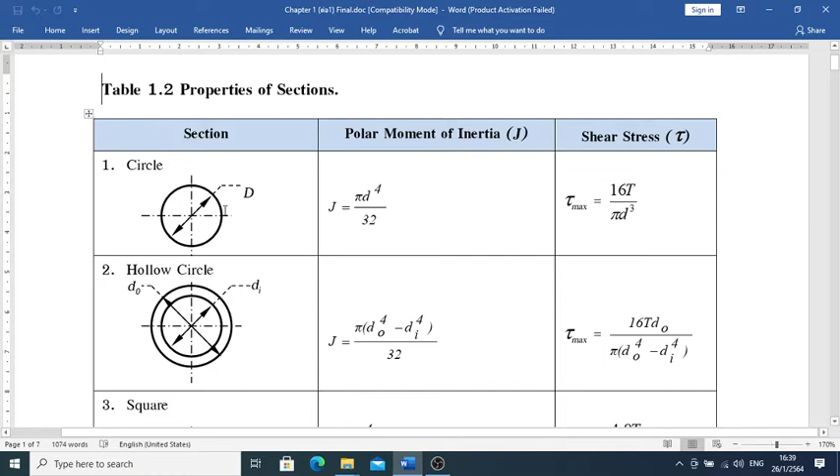And then the shear stress is going to be the tau maximum, experienced right there at the surface, of course. So shear stress is maximum at the surface most of the time. So number one is going to be the circle, and number two is going to be the hollow circle. Each has a corresponding J in the second column, and third is the tau max at the surface.

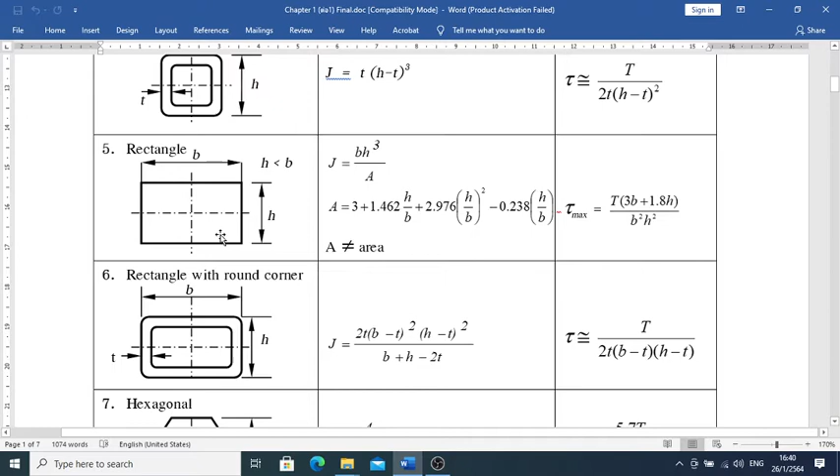Then the square shaft and the hollow square. Then rectangle, and rectangle with a hollow inside, and number seven is going to be hexagonal. That's what we've got, with the J and the tau max experienced at the surface of the shaft, respectively. And then we have an example that I would like to show you.

It says here, a shaft transmits 10 kilowatts of power at a constant speed of 1,750 RPM. It is made of 1030 CD steel. Determine the shaft diameter by using the yield strength and a safety factor n sub y equal to 2 when the shaft is (A) solid and (B) hollow with D sub o over D sub i equal to 2.

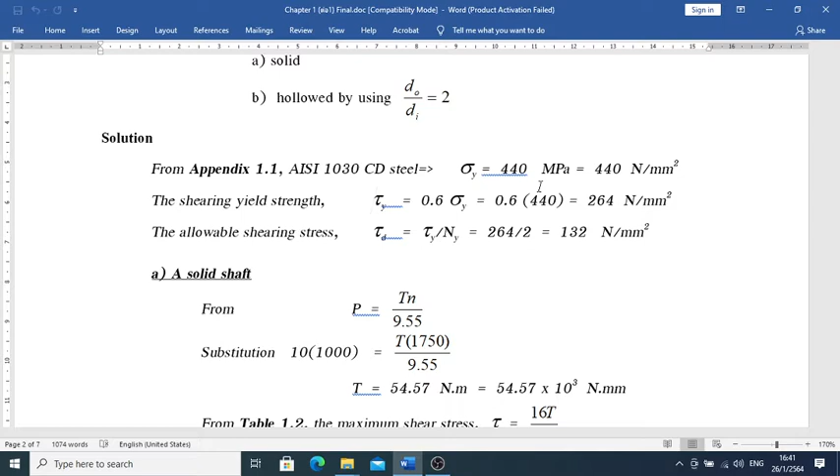So it's given by the problem: 1030 CD steel. Based on appendix 1.1, we get a sigma y of 440 newtons per millimeter squared. Since this problem uses tau sub y, we find tau sub y is equal to 0.6 sigma y due to the simple stress relationship, of course. And then with n sub y equal to 2, the tau design is equal to 132.

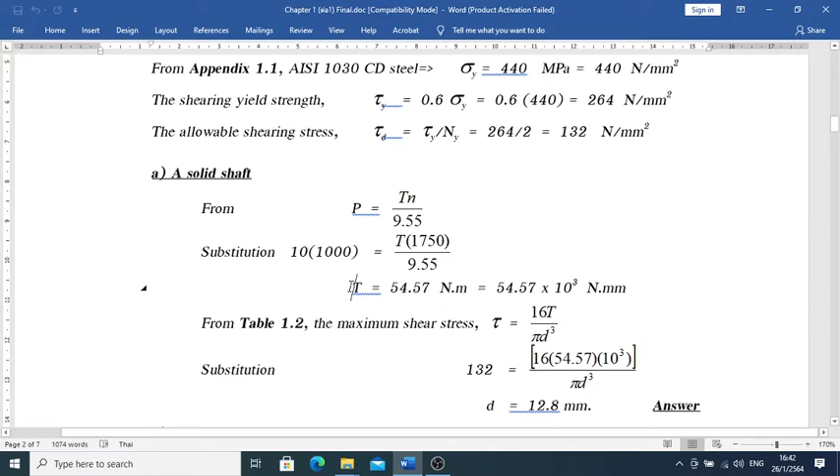Now for the solid shaft, part A. Given by the problem, 10 kilowatts and n is 1,750; 10 kilowatts is times 1,000. We find the torque in newton meters. Then based on table 1.2, tau is equal to 16T over pi d cubed. We make the substitution, we've got one unknown left, and we get a diameter of 12.8 millimeters.

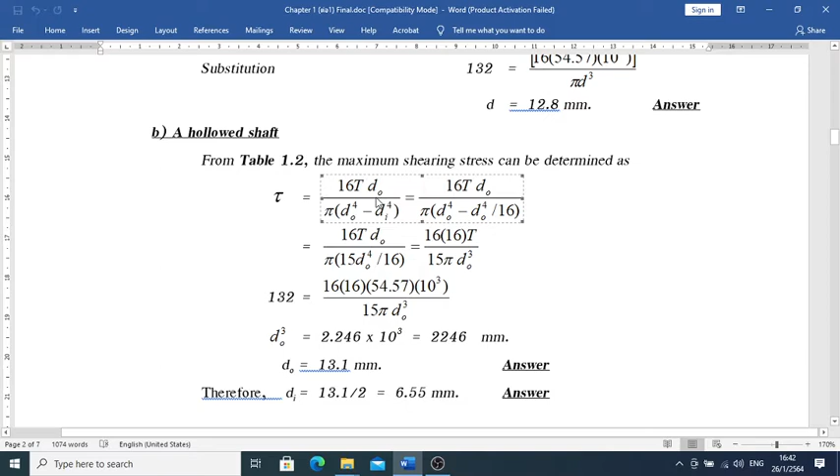That's the answer. Then for question B, the hollow shaft, we just plug in tau in the equation and solve for only one parameter, d sub o. The problem says d sub o over d sub i is equal to 2, so we switch everything to d sub o and plug it in. We get d sub o of 13.1, and then the one thing left over is d sub i.

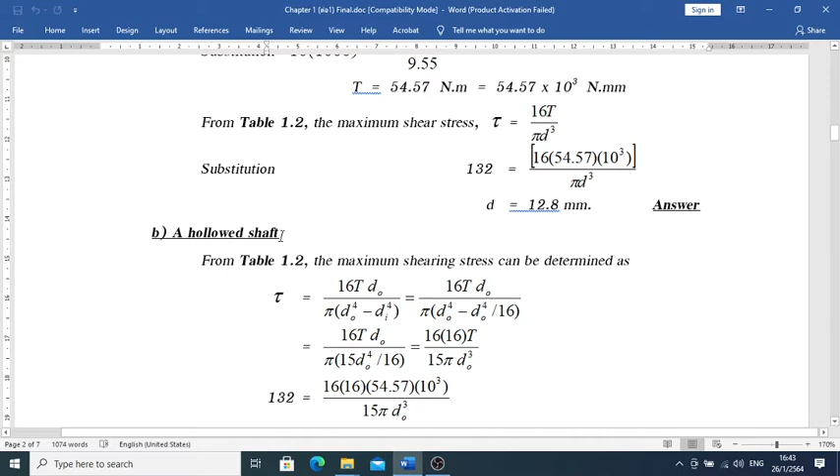So this answer is quite significant. You may compare the answers: d sub o is 12.8 and 13.1. They're very close to each other. Nowadays, with new technology, we can find hollow shafts easily, but during my time it was difficult. Today technology is ready to produce hollow shafts easily. They reduce a lot of weight for the shaft.

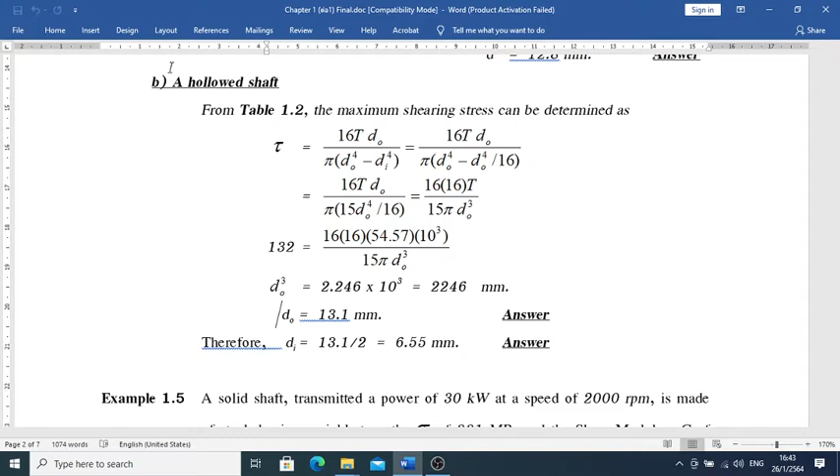Okay. And then example 1.5 is another one you guys should think about. Have a look at it by yourself. Okay, let's go to another type of stress, what we call bending stress, of course.

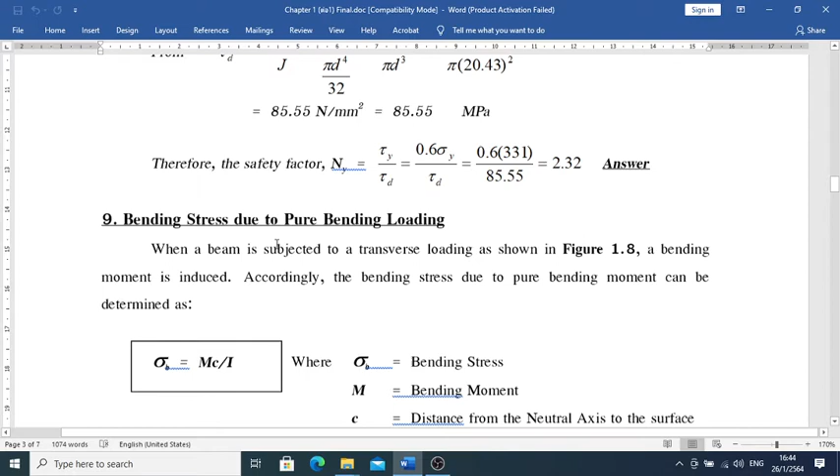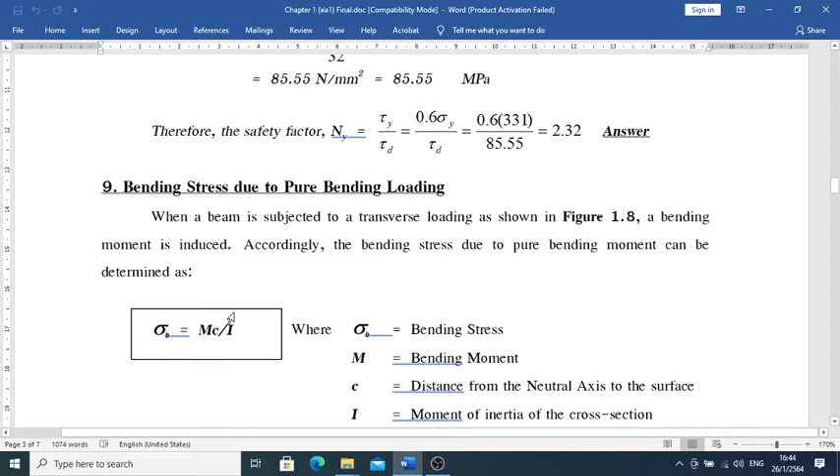Okay, bending stress due to pure bending. What does it mean by pure bending? Pure bending means only bending loading is applied on it. So therefore, if we have only pure bending, we're going to have sigma b equal to M times c over I. It's going to be right there.

For figure 1.8 there, we have a beam, a simple support beam, with a left support and right support respectively. We have a force F, what we call transverse loading. This force acts perpendicular to the axis of the beam. So therefore we have transverse loading.

So therefore this beam tends to be bent like a curve, all the way, and we have a neutral axis. I'm trying to make a drawing like that. The neutral axis is not exactly at the middle of the cross-sectional area. It's not necessarily right there at the center. So therefore, the neutral axis means the stress is going to be zero at this axis. This is what I show you up there.

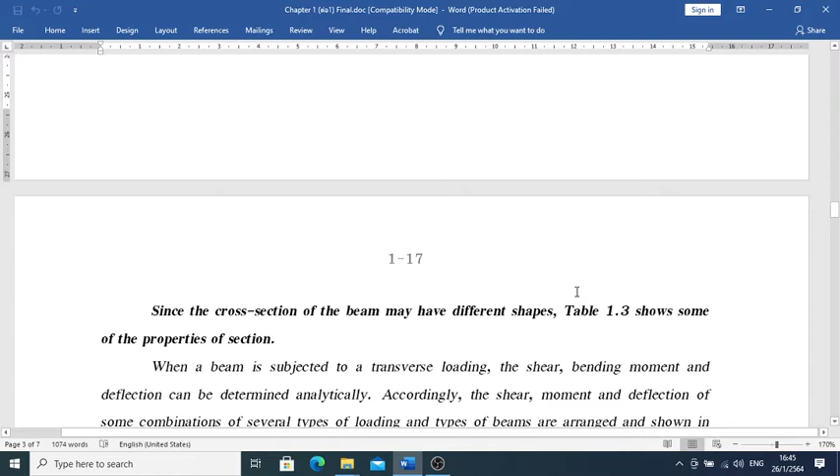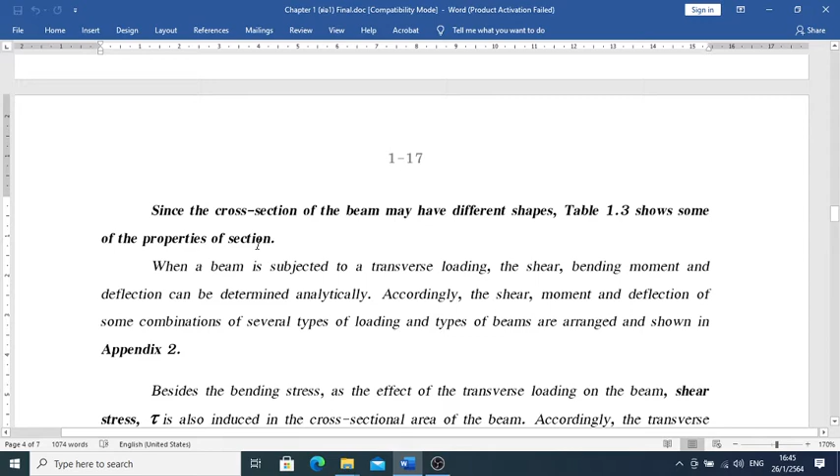Since the cross-sectional beam may have different shapes, table 1.3 shows you some properties of the section. So I show you there in table 1.3 already, and then in appendix 2. Could you please have a look at it? I have done shear and bending moment diagrams of many types of loading acting on many types of beams, simple support beams, cantilever beams, with single load and double load on the beam. You may figure it out making use of it.

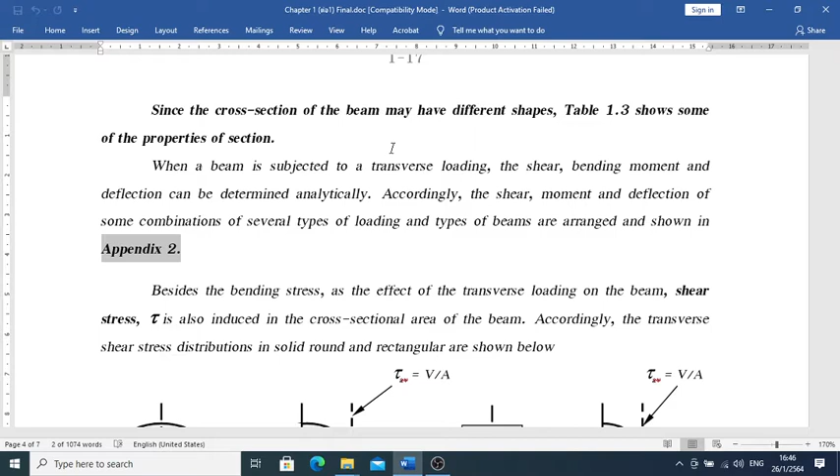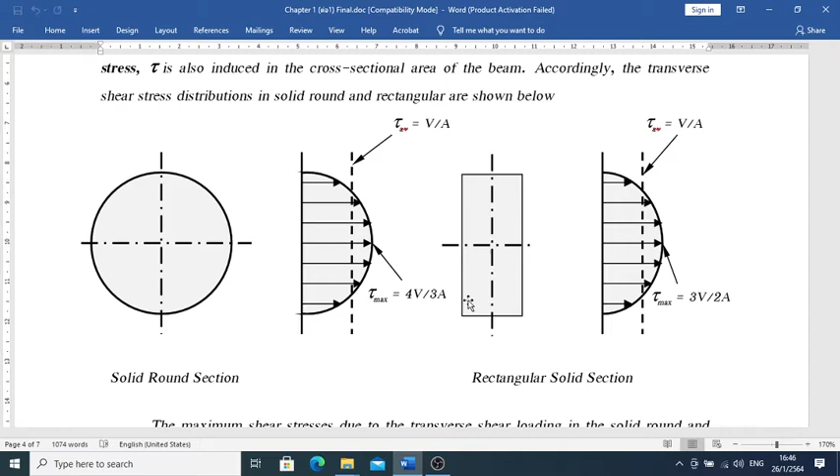And then another thing we're experiencing is not only the bending stress, we're also experiencing the shear stress induced within the beam. If the beam has a round section, we experience tau max right there at the center. This tau max is equal to 4V over 3A, and it's going to be minimum at the surface.

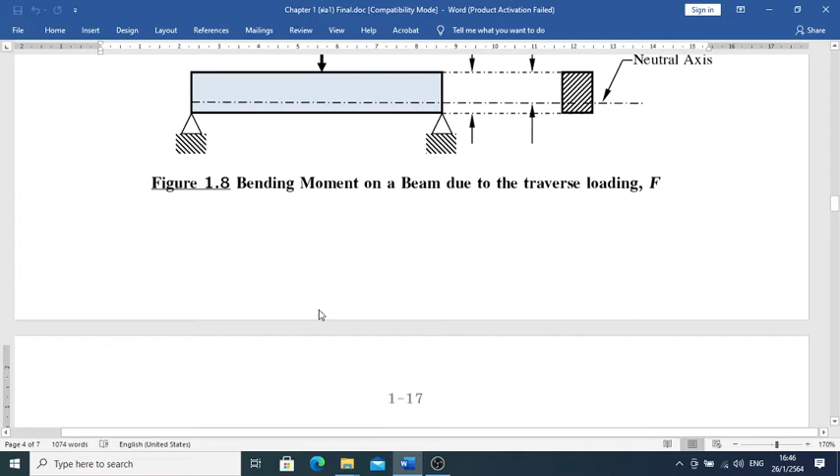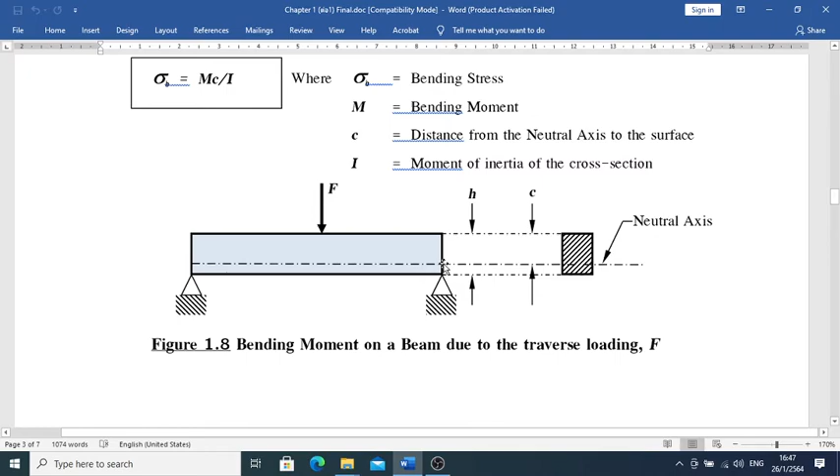If you compare it to the beam there, you're going to have maximum sigma right there at the surface, and minimum at the neutral axis. It's the opposite here. Tau max is maximum at the neutral axis, and the minimum, which could be zero, is at the surface. It's going to be in the opposite sense.

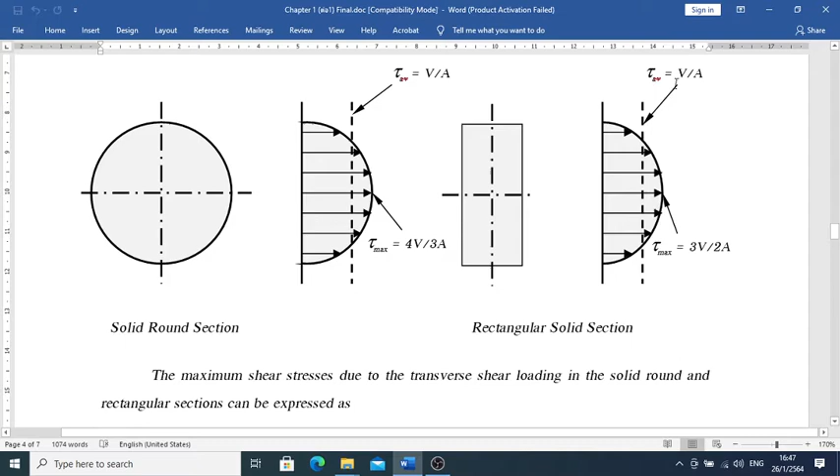And when the cross section is a rectangle, it's going to be 3V over 2A maximum right there at the center of the axis, and it's going to be zero at the surface. It's going to be V over A for the average, of course. So please keep this in mind. I make a conclusion here for the maximum shear.

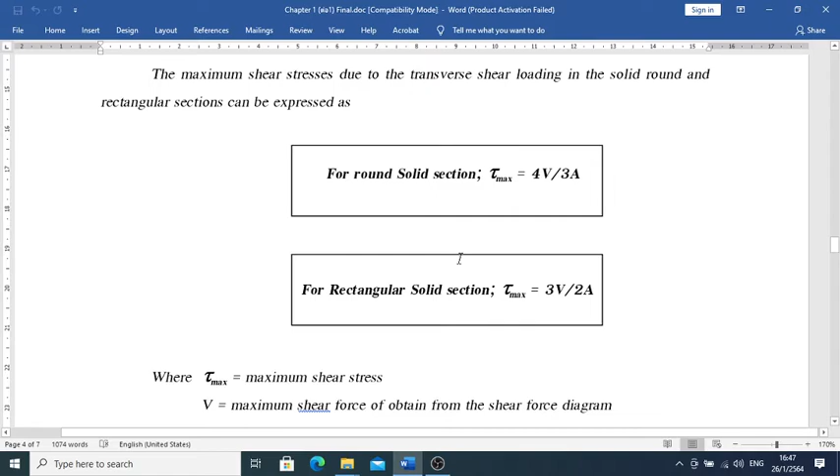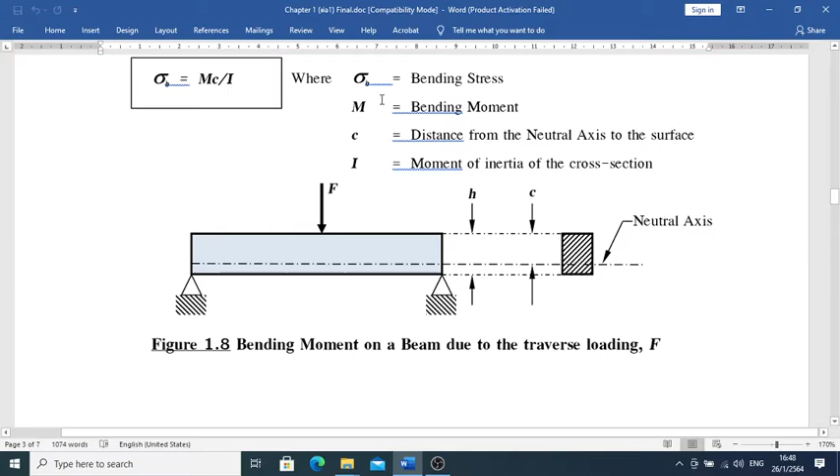So therefore, in conclusion, for external transverse loading, we experience two stresses: one is sigma, the second is tau, at the same time. This happens mostly in the beam. So therefore, let's see the example quickly.

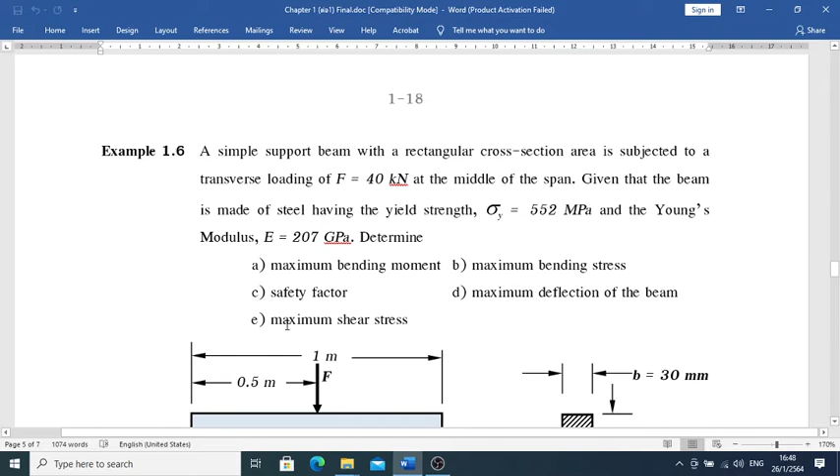Example 1.6. A simple support beam with a rectangular cross-section area is subject to a transverse loading of F equal to 40 kilonewton at the middle of the span. Given that the beam is made of steel having a yield strength sigma y equal to 552 megapascal, and Young's modulus E of 207 gigapascal, determine A, maximum bending moment, B, maximum bending stress, C, safety factor, D, maximum deflection of the beam, and E, maximum shearing stress.

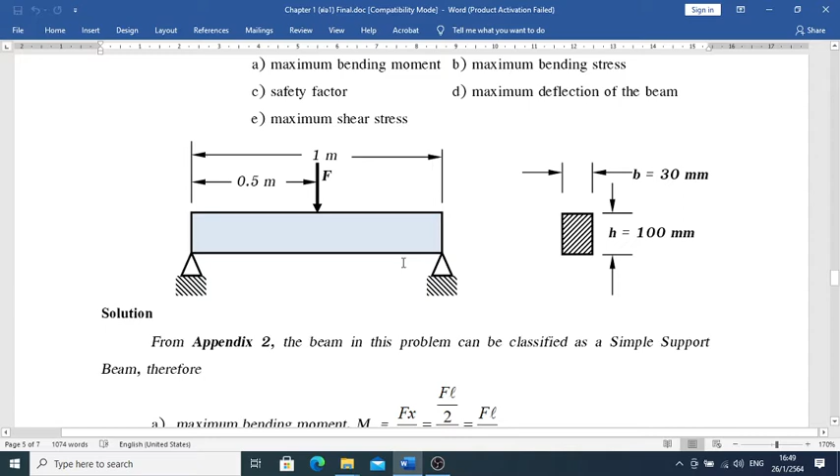Let's see the figure there. We have F right there at the center. We have simple supports on the left and on the right, and the beam is a rectangle with b of 30 and h of 100. So look up appendix number 2 there. We have a simple support beam, and then we look right there at appendix number 2.

We automatically find the bending moment equation, M equal to F times x over 2, and then we plug it in for the maximum. So based on appendix number 2, it's maximum at x equal to L over 2, there at the middle of the span. So therefore, I make the substitution x equal to L over 2 right there.

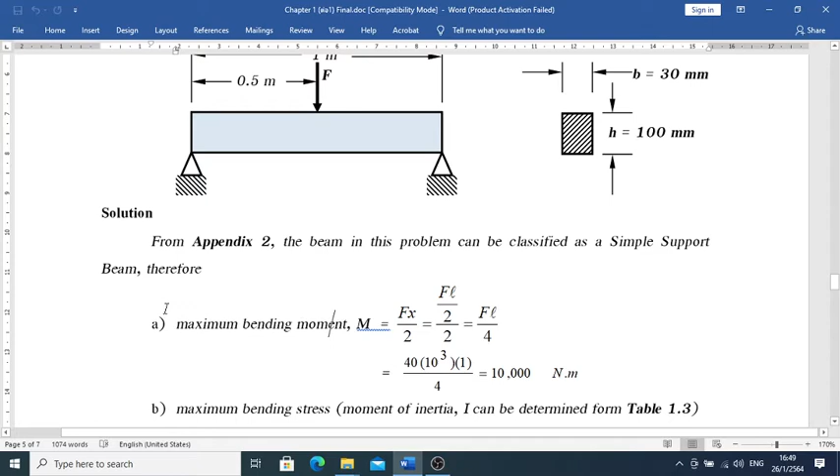So therefore, I find the maximum moment is equal to F times L over 4. So I find the result is going to be 10,000 Newton meter, things like that.

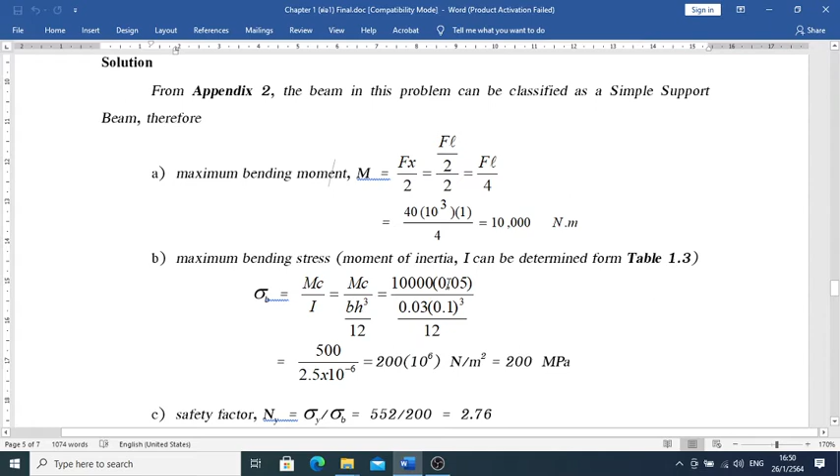Okay, and then the maximum bending stress. I find the I from table 1.3, there it's equal to B times H cubed over 12. I just make substitution there for the problem set, and then M times C. I make the substitution there also. I got a sigma B there.

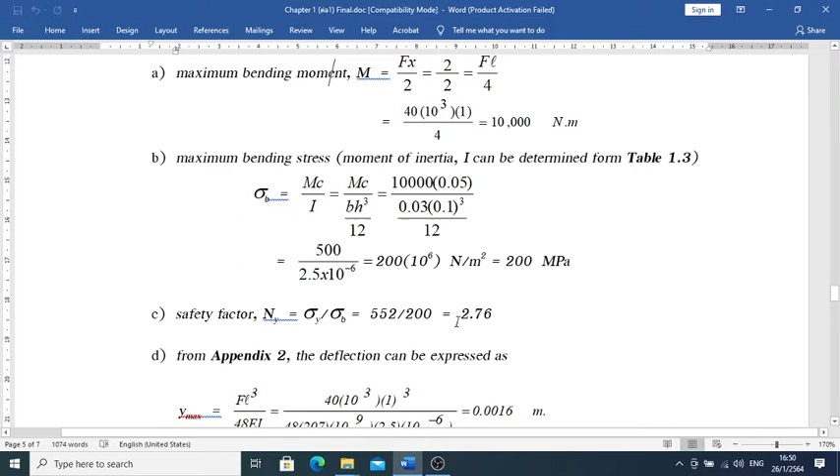That's the answer. So automatically C is going to safety factor is equal to sigma Y over sigma B. I find it automatically 2.76.

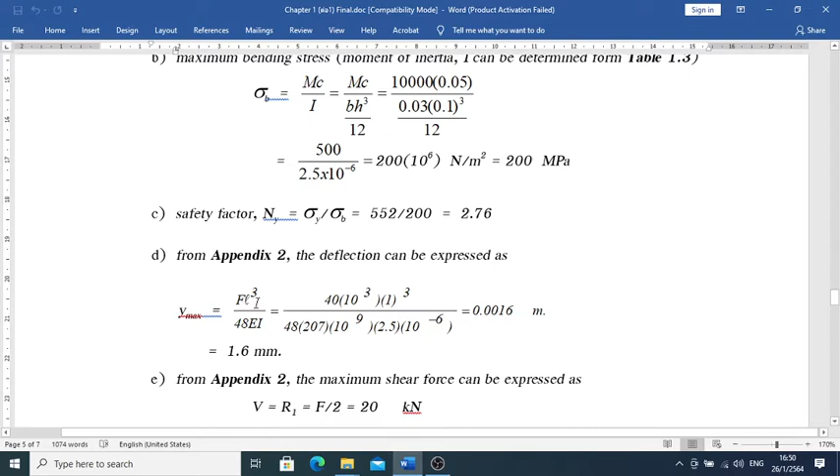Okay, and based on appendix number 2 there, I find the Y max there. I put it up there, and then I make a substitution to the corresponding number. I got the answer there, and then also the question is, I got the appendix 2, the maximum shear force.

I found it. V is equal to R1 equal to F over 2 respectively. Constants all the way from the left to the right. Okay, it's going to be 20.

So therefore, the tau max is going to be equal to 3V over 2A, because this is a rectangle, right? It's going to be right there at the center of the beam. So therefore, this is the answer of question E, respectively.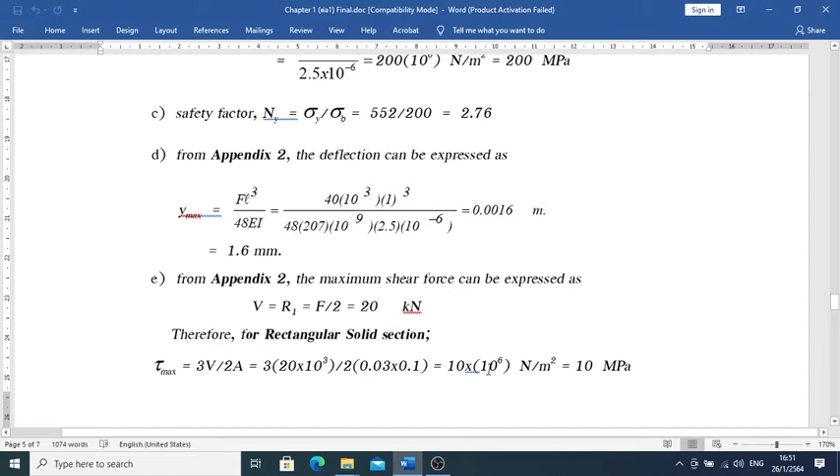Okay, so this is based on the example of bending of beams anyway. So next is going to be the last thing, which is buckling stress.

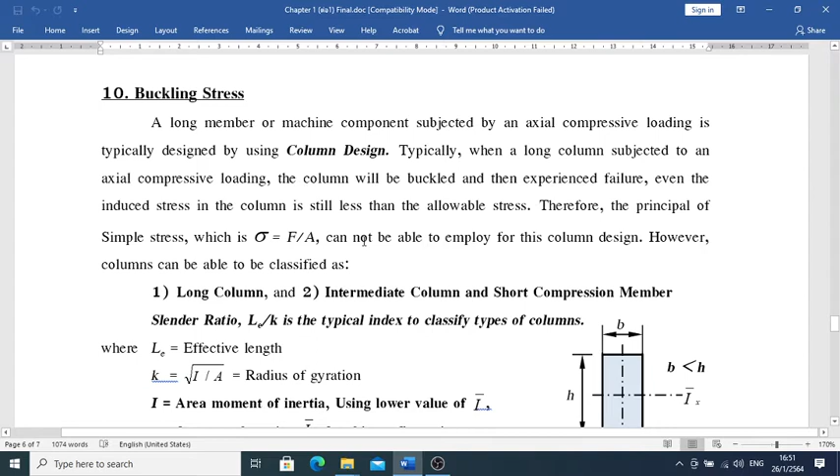Okay, buckling. What does this mean by buckling anyway? Buckling is going to be the thing that what typically happens when a machine component bends on the side, with a long column, things like that, okay.

Let me read it out for you guys. Buckling stress means a long member or machine component subject to an axial compressive loading is typically designed using column design. Typically, when a long column is subject to an axial compressive loading, the column will buckle and experience failure, even though the induced stress in the column is still less than the allowable stress.

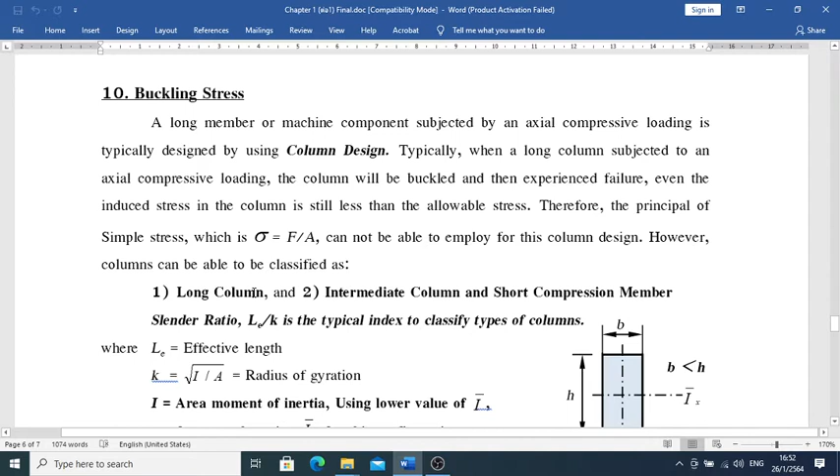Therefore, the principle of simple stress, which is sigma equal to F over A, cannot be employed for this column design anymore. So therefore, the column design should be classified as long column, intermediate column, and short compression member.

So therefore, the thing to be judged, which one is number one or number two, is the slenderness ratio. Slenderness ratio is determined from L sub E over K. This is going to be the index there.

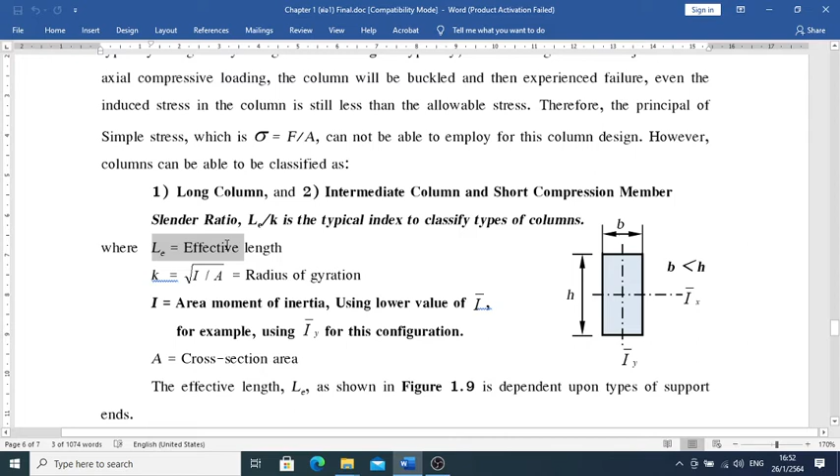So let's see L sub E first. L sub E we call the effective length. The effective length depends on the configuration, okay? The configuration for the types of column is going to be in figure A, B, C, or D, respectively.

In figure A, we have a column that looks like that, okay? The first end, we just fix it, and then we have a joint there, and another joint there. We have another end, we just apply the force on it. We allow them to move in the up and down position, but not on the side, okay, so the L sub E equal to L respectively.

And then in figure B, okay, we fix down one end, the other end we just let free all the way. The L sub E equal to 2L right there, okay, and then in figure C, if we fix both ends, both ends, so therefore the L sub E equal to 0.5L.

This is most of the machine parts that we typically work with. And D is going to be another type of machine part. We fix one end, the other end we just allow them to move in only one direction. The other one we just fix it. We have the L sub E equal to 0.7L. This is the typical types of configuration of L sub E, based on the configuration.

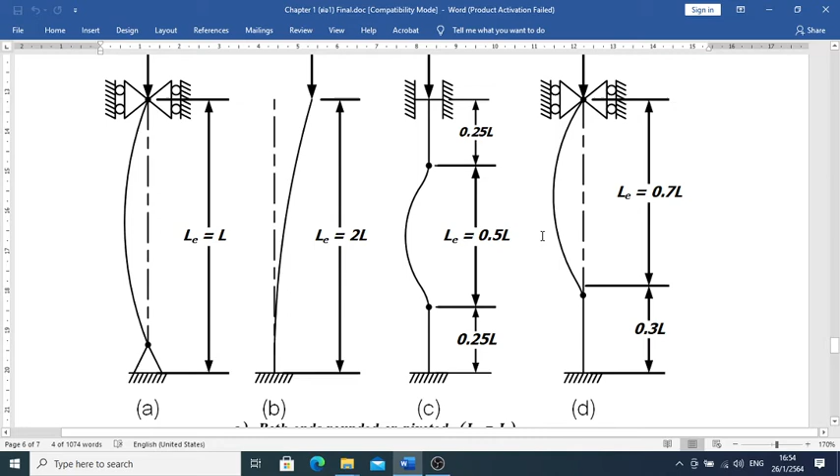So another one is K, the radius of gyration. Radius of gyration is based on two factors, I over A. I is going to be the area moment of inertia. It's considered here using the lower value of I bar anyway. For example, use I sub y for this configuration. Let's see this configuration: B is small and H is high.

So I sub x and I sub y: I sub x is equal to BH cubed over 12, and I sub y is equal to HB cubed over 12, things like that. So of course, I sub y is gonna be very small, very small. So therefore we're gonna use I sub y for this configuration, for the calculation.

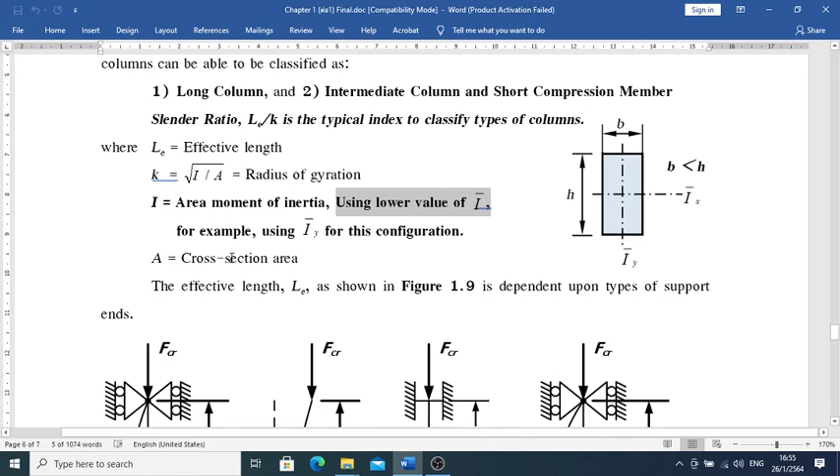Or we just might say that it's gonna buckle in the y direction. So the cross-sectional area is going to be A there. And then another one is going to be the critical loading, F sub CR, and the critical stress is going to be sigma sub CR, respectively.

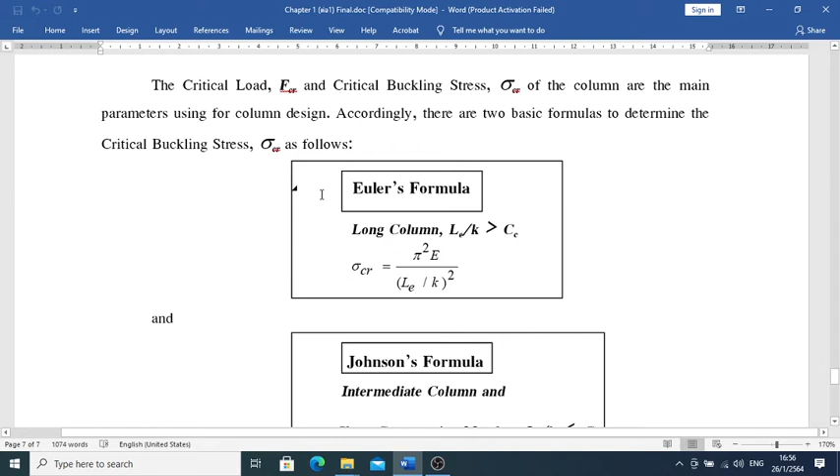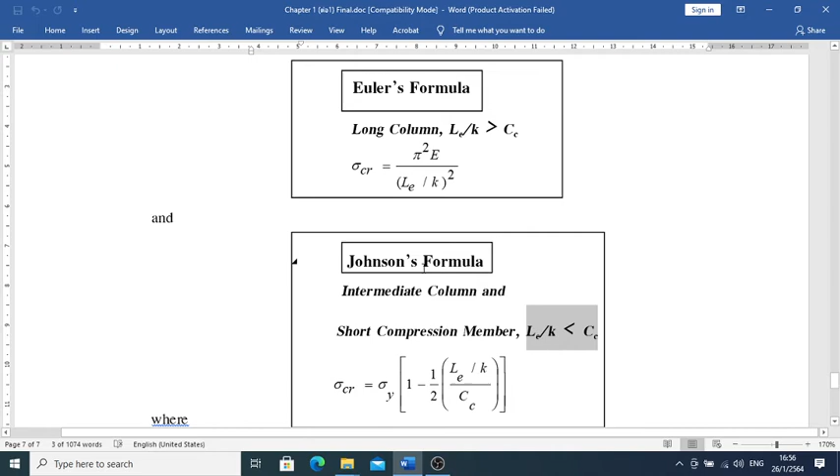And then we're going to have the equation of the Euler formula, and we're going to make judgments for the long column by using the slenderness ratio. If L sub E over K is greater than C sub C, we apply for long column. If L sub E over K is less than C sub C, we determine it as a short compressive member and apply the Johnson formula, respectively, by using the formula.

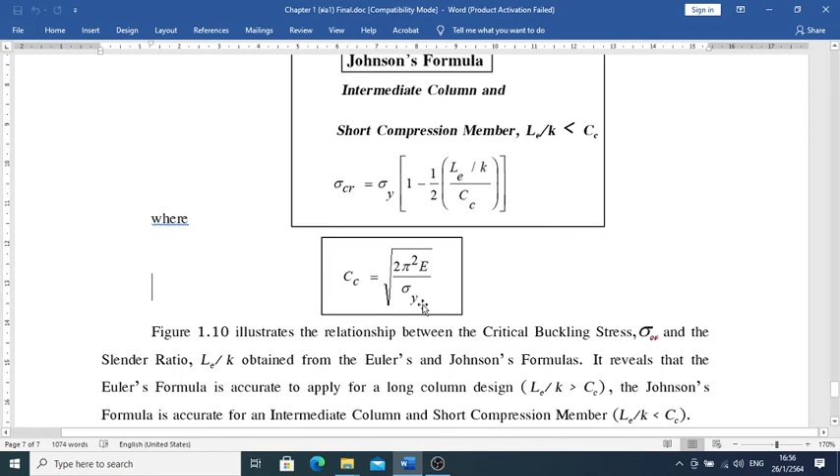Otherwise, C sub C is defined from the characteristic of 2 pi squared times E over sigma y, because E and sigma y are the constant terms that are the characteristics of the machine members, things like that.

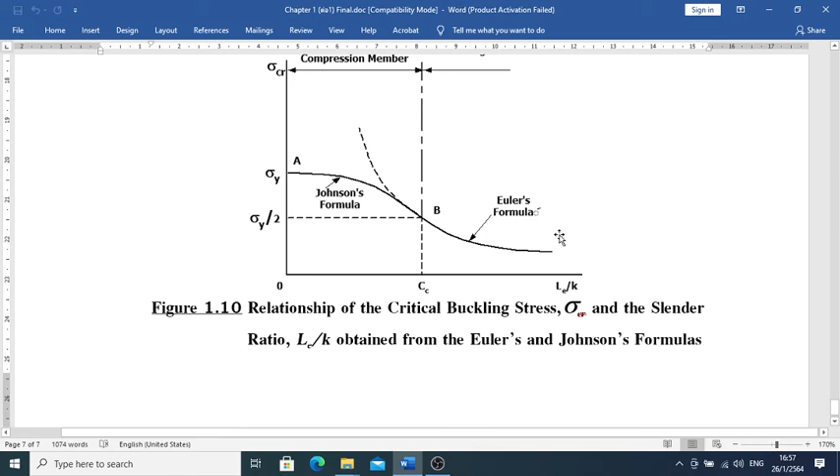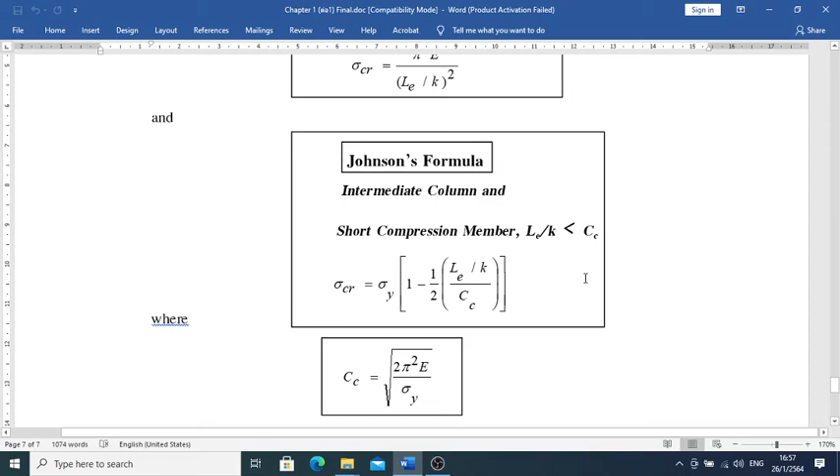Sometimes, if we have a short member, we can apply Johnson, which can be approximately the same as F over A. So sigma sub CR is gonna be estimated to be F over A. Sometimes it's very equal to each other.

All right, so this is gonna be the theory about it already. So let's go for what we left over.

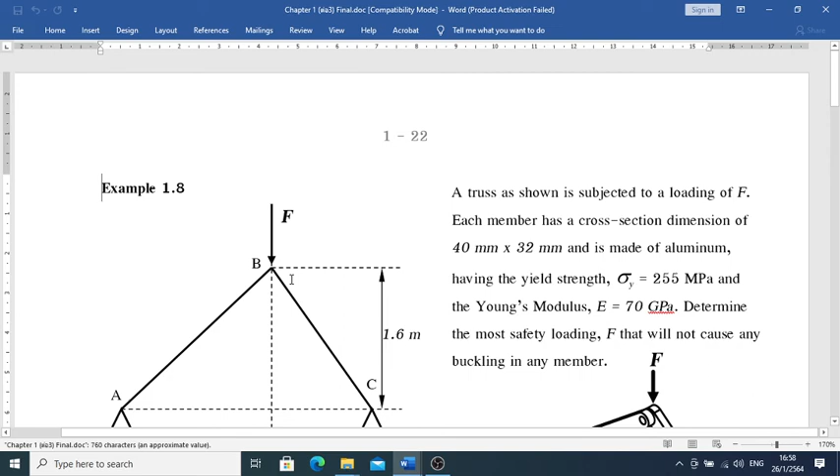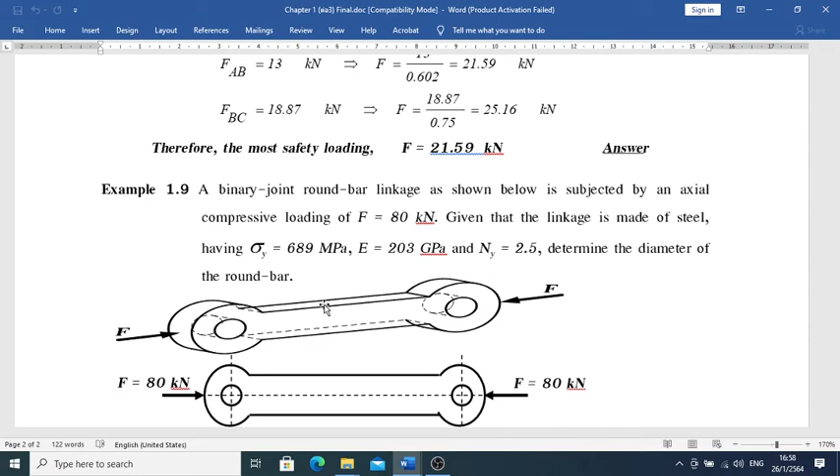One example there, 1.8, you may have a look at it by yourself. 1.8 is gonna be some kind of example. Example 1.9, okay, this is gonna be a binary joint, a very good example. Have a look at it by yourself.

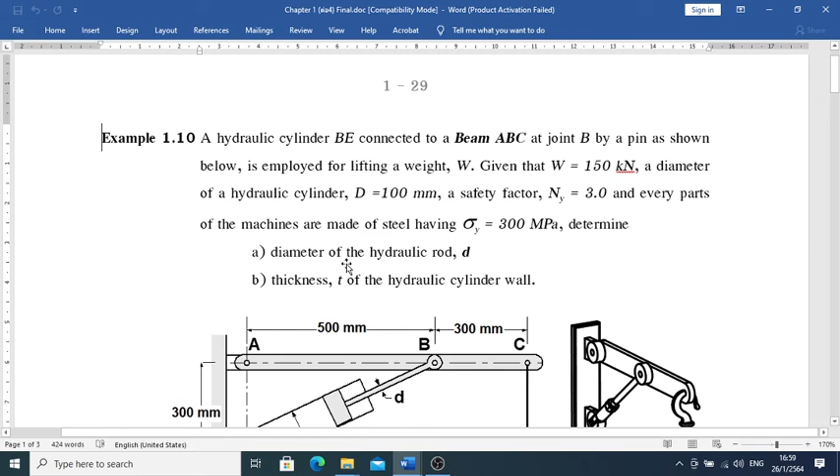And then example 1.10. I used to put this one maybe 5 years ago. I put this one as an example, as an exam, but 5 years ago anyway.

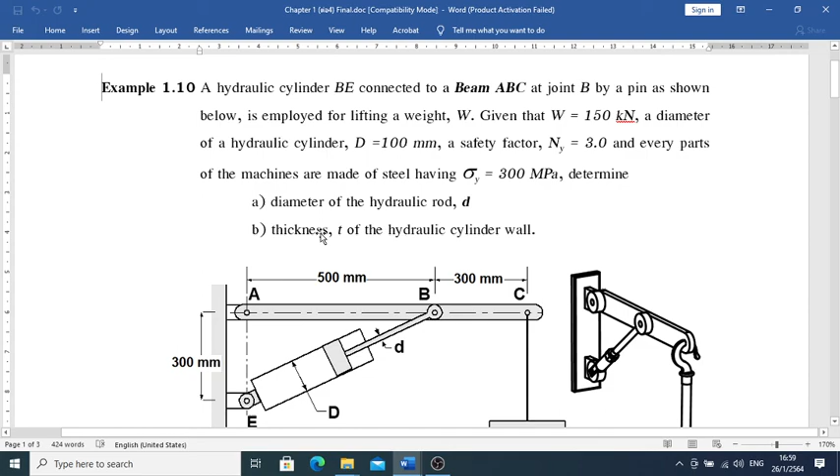So this is a hydraulics beam, things like that. That's what I put on it. I asked for the diameters of the rod here and the thickness of the wall of the cylinder. May have a look at it. It's pretty straightforward to have a look at it.

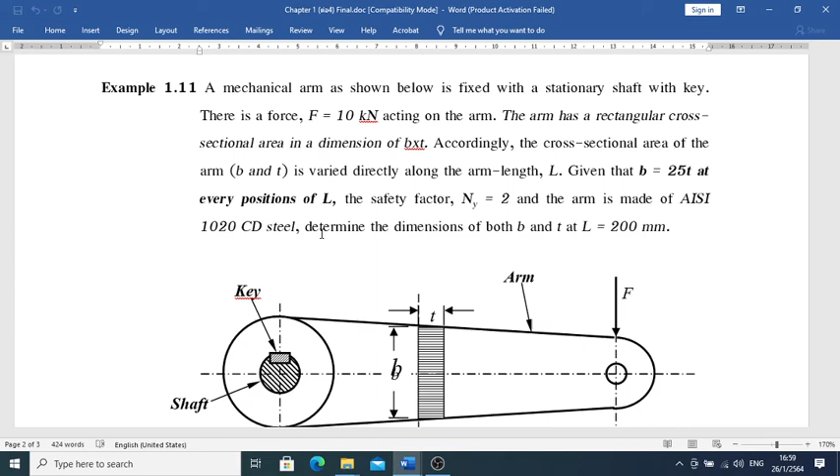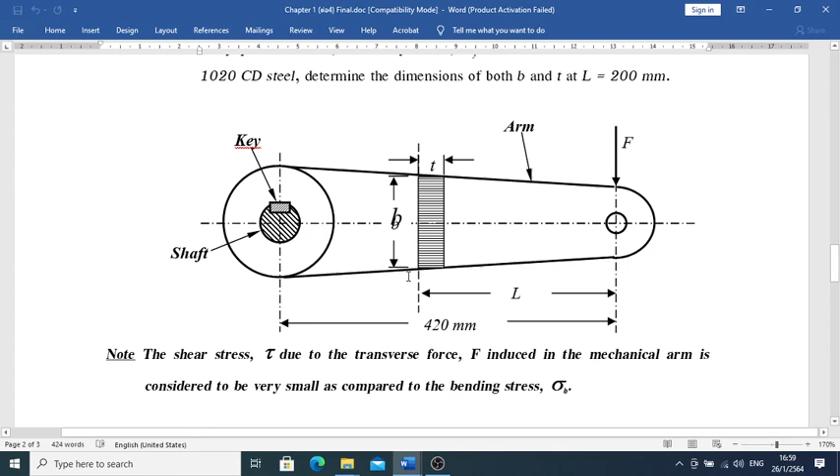And then 1.11, another exam that I put up for you as an example, for me 2 years ago. You may have a look at it by yourself. This one, I'm sorry, this is going to be the arms, crank arm, things like that. You may have a look at it. It's gonna be very straightforward anyway.